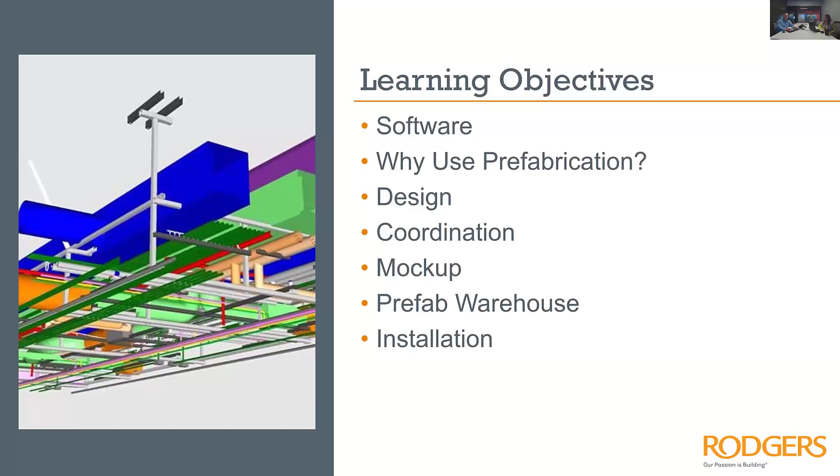From an overall perspective, our project was 108 beds of an install of an 8-story shell core building that we were all building at the same time. So there were 3 floors of med-surg beds that were being installed, 3 floors that were shelled, an interstitial floor of mechanical, plus the podium of the entranceway and support spaces underneath.

All total, it was 260,000 square foot of an addition, 27,000 square foot of a renovation. The overall budget for the project was $130 million, and the final came in at 120. So through the use of prefabrication and other means, we were able to save $10 million off of the project, and the overall construction duration was 20 months.

So we just wanted to touch on some of the software. Obviously, this is a technology group. We use BIM 360 document management, and that was through the owner's hub through Atrium, and then the design collaboration portion of that. And then they did not own Glue or Field.

And so on the Rodgers hub, we managed the Glue side and then also the Field side, where we were running all of our punch list, our issues, all of our document access for drawings and model viewing was going through both of those. And then we use Navisworks Manage as our clash detection software.

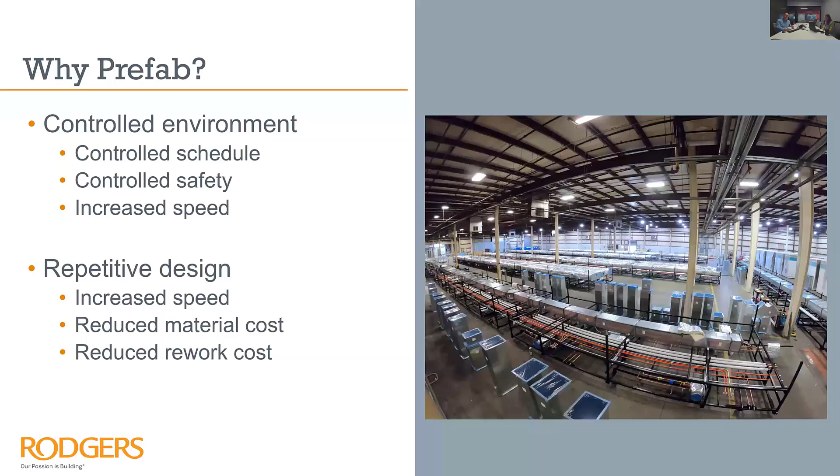Is this the video? Share sound. It stopped. Why did it stop?

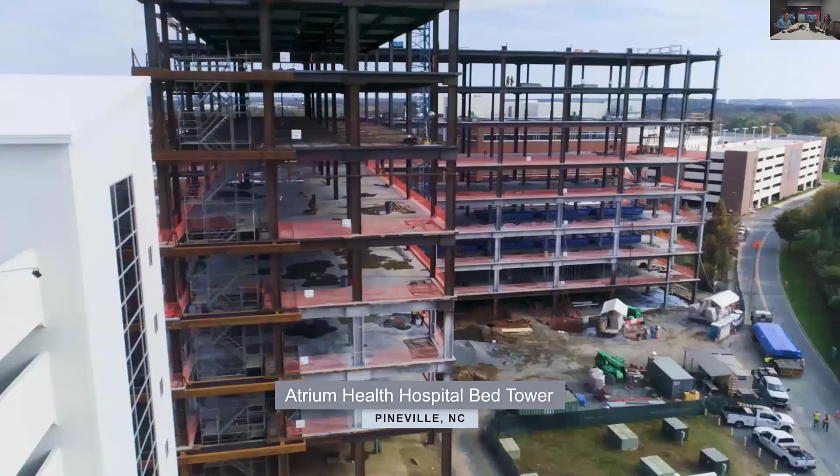Right now, we're on the Pineville Bed Tower project for Atrium Health here in Charlotte, Pineville. We had just completed a similar bed tower project that was traditionally built, stick built, on exterior masonry construction. At that point in time, we started to think that there had to be a better way to improve speed to market. There's a lot of waste in construction, and prefabrication helps us eliminate that waste, both in design and in construction. So on this particular project, Atrium Health wanted prefabrication, and they challenged us to do as much prefabrication as we could do.

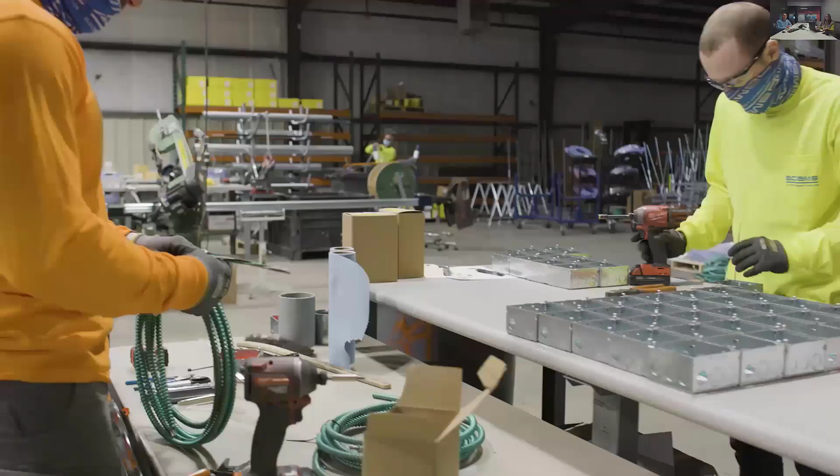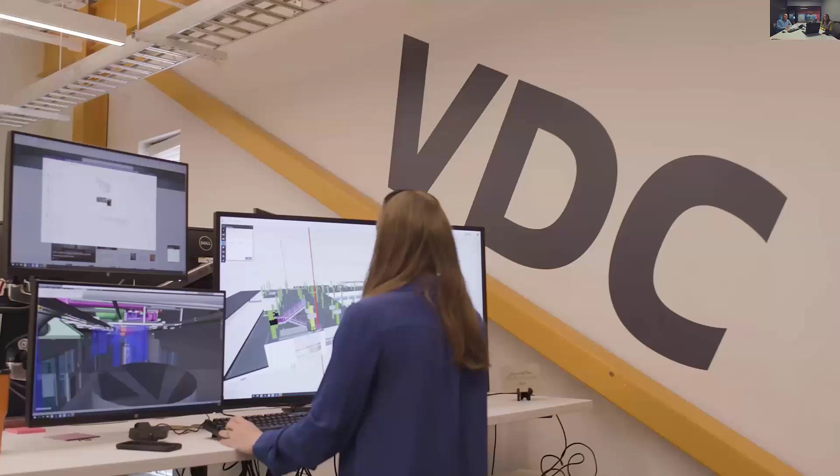VDC, or Virtual Design and Construction, is the process of taking plans for a project and putting them into 3D in a building where you can really see what you're going to do before we even start building it in the field. We have been able to create a rack that can be replicated over and over again.

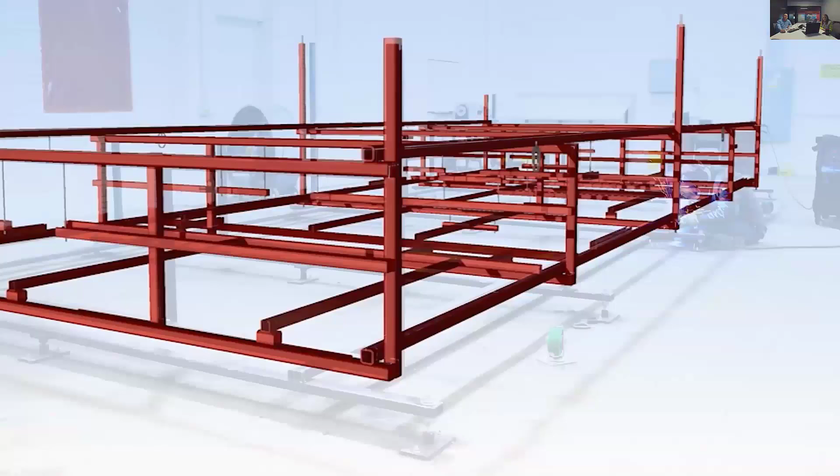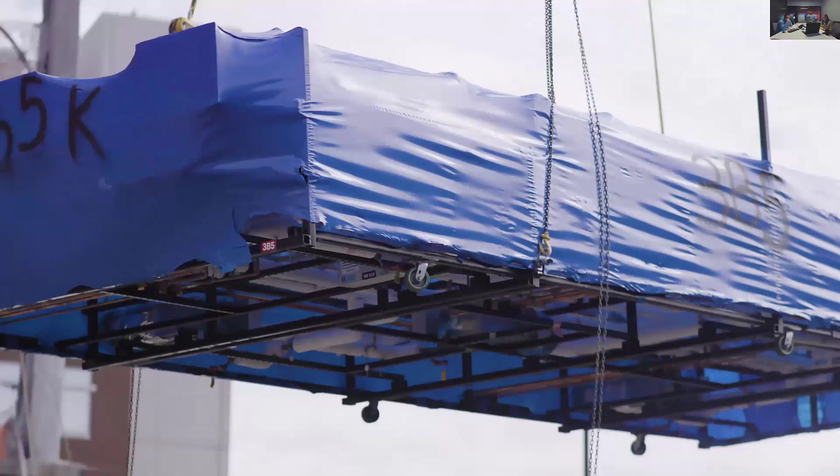It's allowed us to build the racks in a warehouse on the ground so they can really pick up speed and install them quickly. And then once we bring them up to the field, so much of the system is already put together that we can lift up a large portion of what the overhead would typically be all at once, which really eliminates a lot of the time that we have invested and allows us to reduce the amount of labor and workers that we have out on the job site.

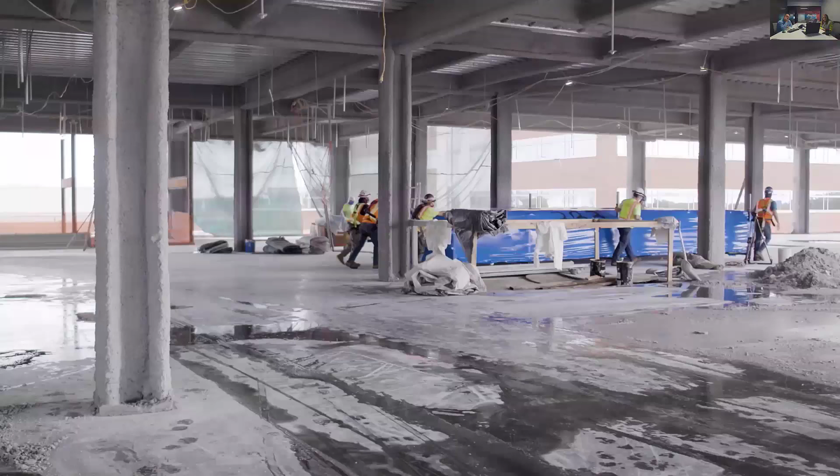Our end goal really is to just help reduce the amount of time and materials used on a project to deliver them to the owner sooner. We immediately told ourselves we don't want to do prefab just for the sake of doing prefab. I mean, it's kind of a trendy thing to say that nowadays. We wanted to make sure it brought benefits to the project. First and foremost is safety.

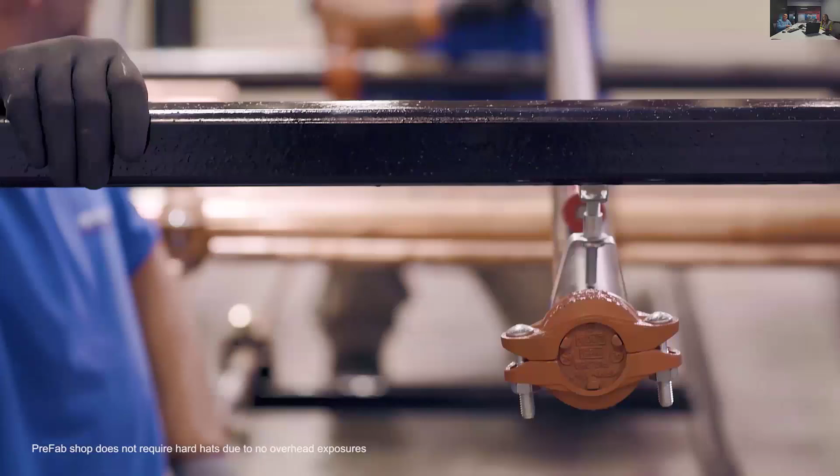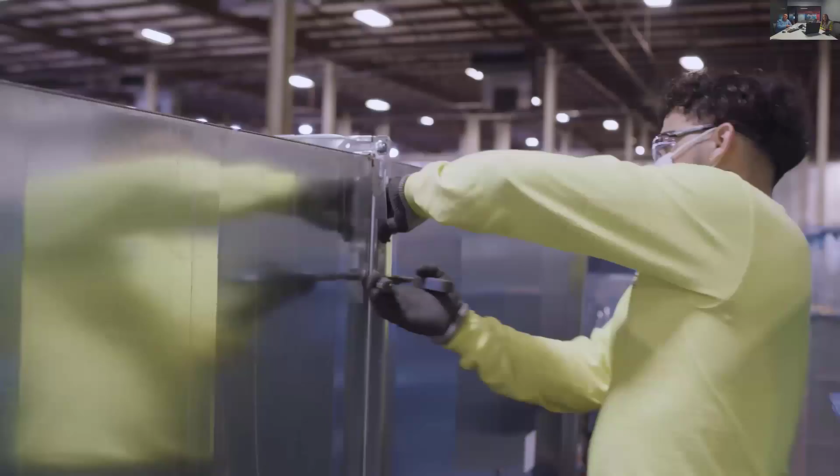Prefabrication, when you're in a controlled environment and everybody's working at waist level and ergonomically it's better for them, it's just much safer. Second thing is quality. When you're, again, in a controlled environment, you do a much better job with making all the connections properly, making sure things are passing properly, and you get a higher quality product.

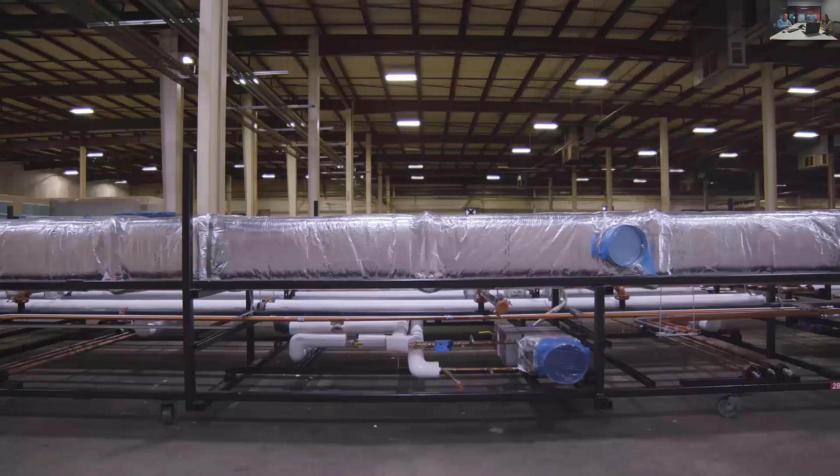It also helps from a schedule standpoint because you can start this work a lot sooner. So these bathroom pods were actually under construction while we were still coming out of the ground on this structure. So that would never happen if you were stick building. Same thing with the overhead racks that's behind me. Those all started several months ago, way before the building was ready for those racks to go in.

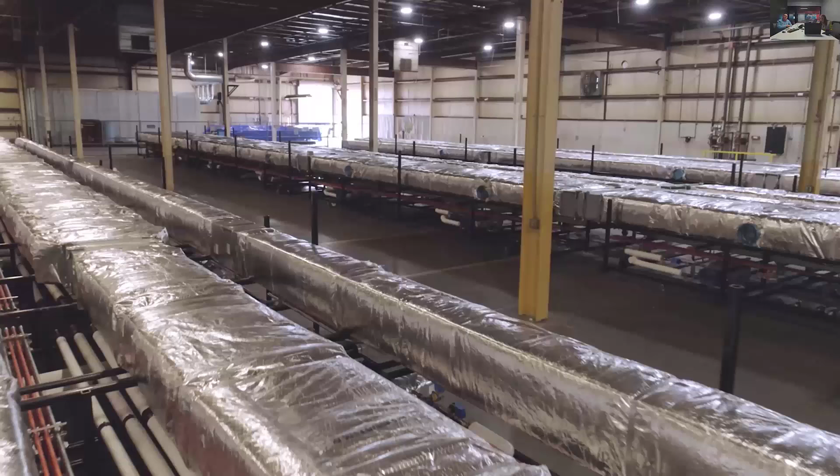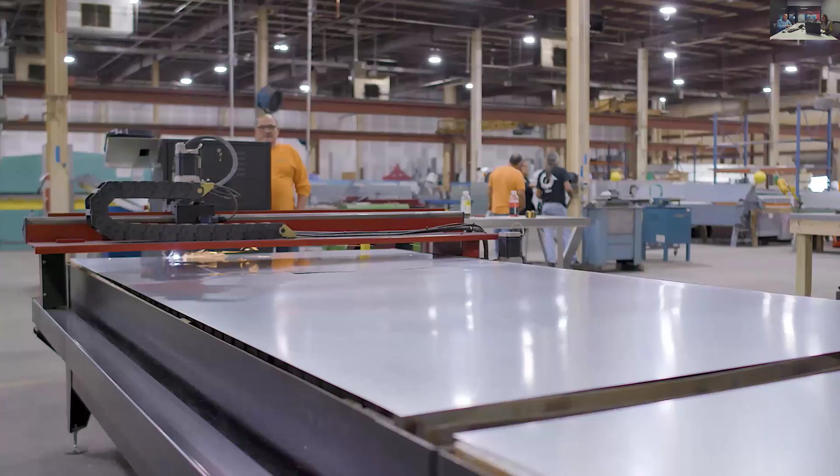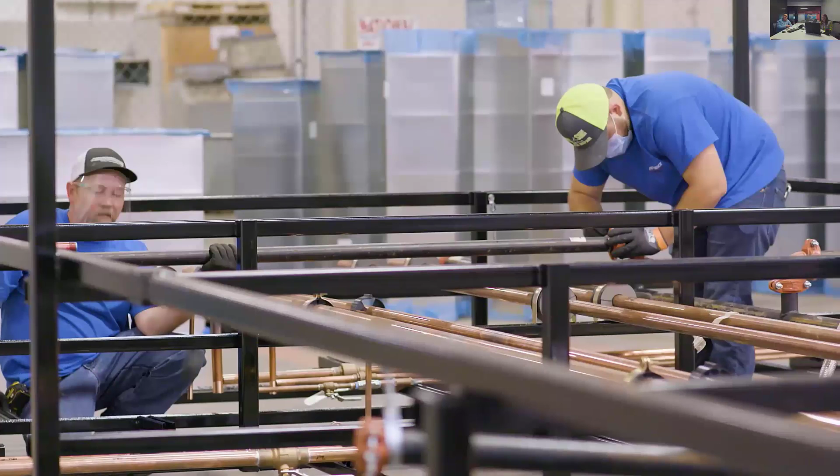What I think you're going to see here, not only in the Charlotte market, but other markets, is you're going to see a lot more prefabrication that takes place. The advantages to it become clearer and clearer as skilled labor becomes harder and harder to find. This project gave us the opportunity to introduce prefabrication to the subcontractors in Charlotte. And so our hope is that they learn from this project and want to do this on other projects and help us convince other owners that this is the right thing to do.

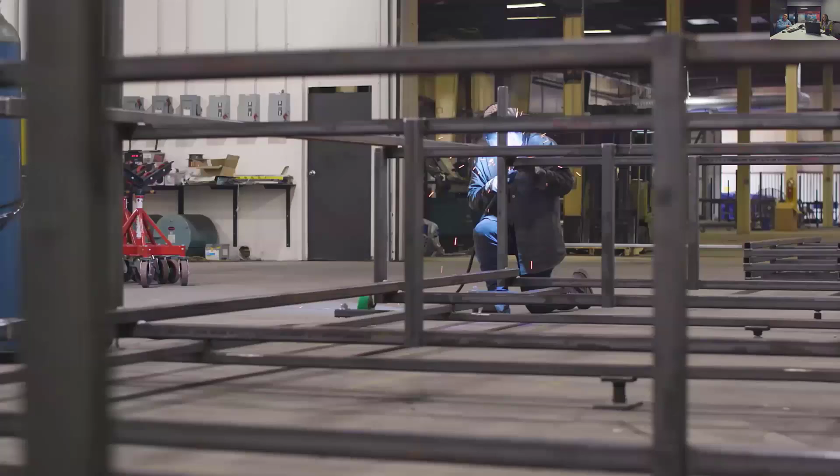Getting brought into something with this level of complexity was really exciting for us because Rodgers Builders is one of the premier contractors in our area and in the state. So we know there's a shortage of labor in the industry. We're going to have to get smarter. We're going to have to use our labor more efficiently. MSS thinks that the future of commercial HVAC is prefabricated efforts. We can do more in our warehouse quicker with the same amount of guys.

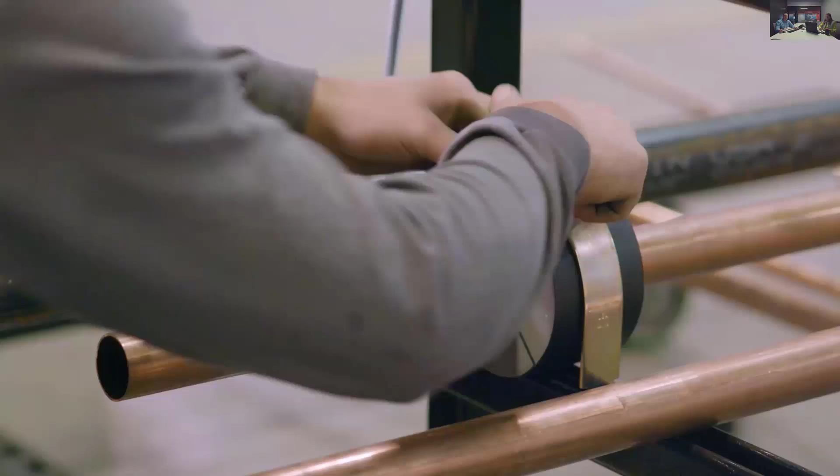10 years ago, if you looked at prefabrication in the electrical industry as a whole, it was more of a contractual obligation. Now this is a mindset. And now it's what can't we prefab? As tradespeople, we're proud in our work, we're proud with what we do. It takes a lot of planning, it takes a lot of time invested in the project, but at the end of the day, this project will come in under budget, and significantly under budget based on the type of project that it is. It's wildly successful.

You can see it here. I mean, the accuracy of those compared to the model are incredible. So the success of these racks really has contributed to Rodgers Builders and the trade partners of Performance Fire, Precision Plumbing, Adams Electric, and MSS. Without them, this would not have been possible. But it's just amazing what we've been able to accomplish here on this job with this team to be doing it for the first time. I'm just real proud of the effort that went into this project.

All right. Moving into the design itself. The video alluded to a lot of the prefabricated components that we had in the overall project. There were 108 toilet pods built, 108 head wall, foot wall combinations. The entire exterior envelope was panelized and prefabricated. That worked out to be 165 acrylic/EIFS panels, and then 173 thin brick panels. And those panels were installed in 23 days.

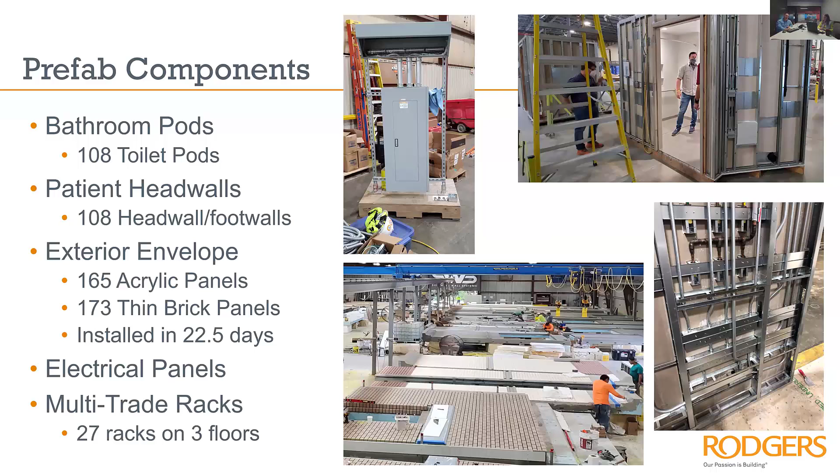The electrical panels and portions of the electrical rooms were prefabricated, and then of course the multi-trade racks, and there were 27 racks over 3 floors. The goal for this project set forth by Atrium was to have 25% of the total budget be prefabricated. We ended up with, at the end of the day, 36% of the total budget. And it was just like what Mr. Schroeder was saying, it was wildly successful.

Is this you or me? I think this one was you.

But it's fine. So from a design standpoint, and you saw through the video, we were designing this before COVID, during COVID, and then building it during COVID and after COVID. So you saw a lot of masks and a lot of face shields. It was essentially, from a design standpoint, a 13-month process.

We did co-locate. So instead of having a job site trailer, we had a 5,000 square foot space that was adjacent to the project site. And we implemented our big room meetings. You'll see the cubicles there. I was on site 3 out of 5 days of the week. Same thing with the engineering team, as well as any other design team and the major subcontractors, all sat in this space all together as we worked through the process here.

Yeah, so we had big room meetings in addition to just sitting together. And so you see that in the image on the bottom, but those big room meetings happened once a week with the whole team, about 40 people, and gave us the opportunity to talk through different ideas that everybody had and vet those out as a larger team for practicality, pricing, and then using that as direction on our design.

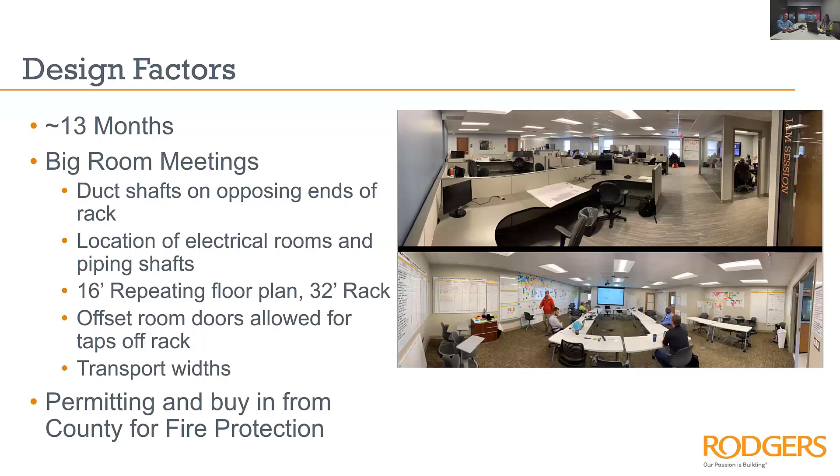Yeah, we treated the permitting, the fire marshal and local building inspection as a teammate for this project. They had seen prefabrication of toilet pods only when it came from the hospitality industry. They definitely have never seen it anywhere else, nor to this scale. So this was new to them. So we treated them just like a team member and brought them in early and often so that they were comfortable with what we were doing.

So I already mentioned that 16-foot repeatable factor with these patient rooms. So this was a sheet that the engineers put together, trying to make sure that if we were fabricating these very long rectangular racks, and then also the bathroom pods that we fabricated, could we insert them into the building, and could we make the turning radiuses we needed in order to get past the column grids that we had, because we did not have a traditional column grid where everything was lined up in the horizontal and the vertical.

So you can see here the columns are highlighted in that dark red, and so they're offset from each other to work with these slanted patient rooms. But this again was just something that we generated to have a lot of these conversations early on in that big room to help guide us.

Yeah, so let me take a quick second here and break down the floor plate for you. Each floor was broken down into two units. The bottom on the left, that's a 20-bed unit, and going vertically, that is a 16-bed unit. Each one of the rooms are same-handed. They are nested and canted. So there's really not a 90-degree angle in any one of these rooms, which also made for some very interesting construction details.

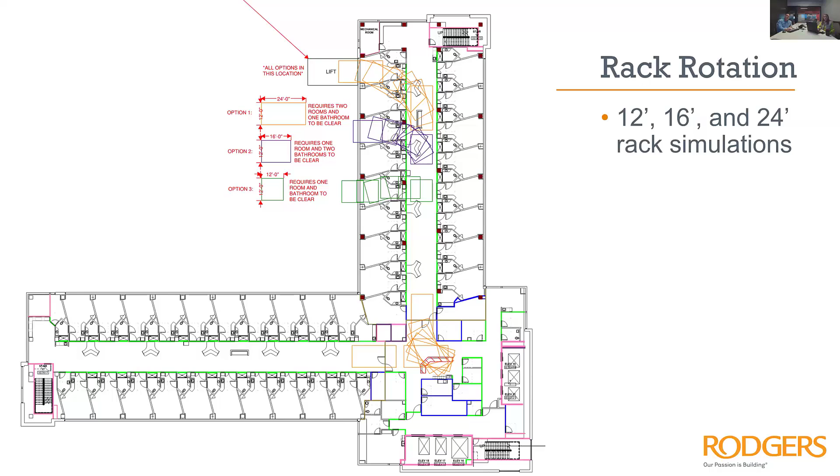So we generated A3s throughout the project to finalize decisions that we made in these big room meetings, and use them as reference if we needed to on why we made a decision later on in the project if somebody asked the question.

So this is the MEP shafts specifically, and one of the key things that we talked about was where do we place these duct shafts when we worked through what the racks were going to look like transferring down these corridors. And so originally we had started in a traditional sense where we had the shaft located in the center of the building, and that was going to support both the return air and the supply air.

But as we were having these conversations in the big room, when we started looking at the duct sizes to get an idea of what the layout of these racks would look like for width and height, we very quickly understood that the largest duct all happened together at the same spot, and the smallest duct at the ends of the corridors was all happening in the same spot. So the floor plan was revised to put the return duct shafts at the ends of the wings and the supply in the center of the wing.

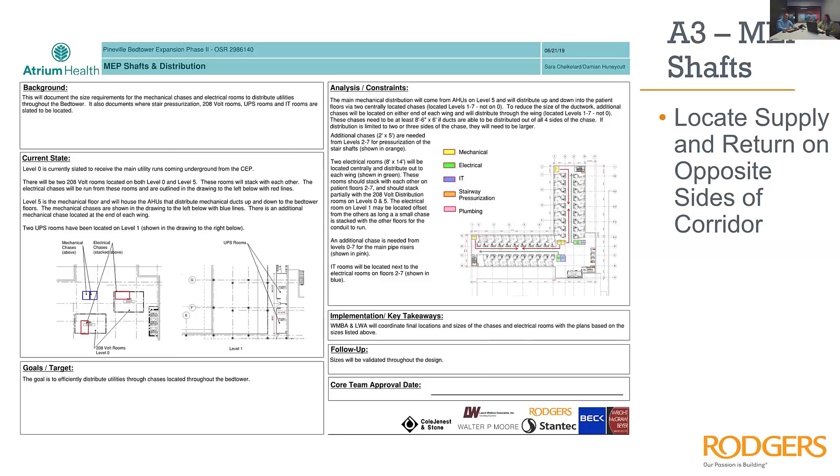And so that way, as one got smaller, the other one got larger, and they could share that same space in the rack. And we didn't end up with an inefficient rack, because by the time we got to the end of the corridor, there wasn't much left on it. Correct. And I cannot stress enough that once you make a decision like this, you document it and you move on, and you don't come back and rehash the decisions that you previously made.

So, I have a number of slides here that show some iterations of the rack. We're not going to talk through each one, but the takeaway here is we started with an idea of a rack initially on what we thought we could do. And then as we brought these ideas to the big room meeting every week, we had this up on a large screen, and everybody got to give their input on pros and cons, any questions they had, or anything they wanted to challenge us with.

You can start clicking through them. And so we generally would bring 2 iterations to the meetings, so everybody could rank the pros and cons between those 2 choices. Before you get too far, I don't want to foreshadow here, but you can see a clash already happening through the middle of the duct running through the space with one of my designs for the soffit. So this was one of the early iterations, and this is where the back and forth went through from a design standpoint and a constructability standpoint. I'll talk more about this in a minute.

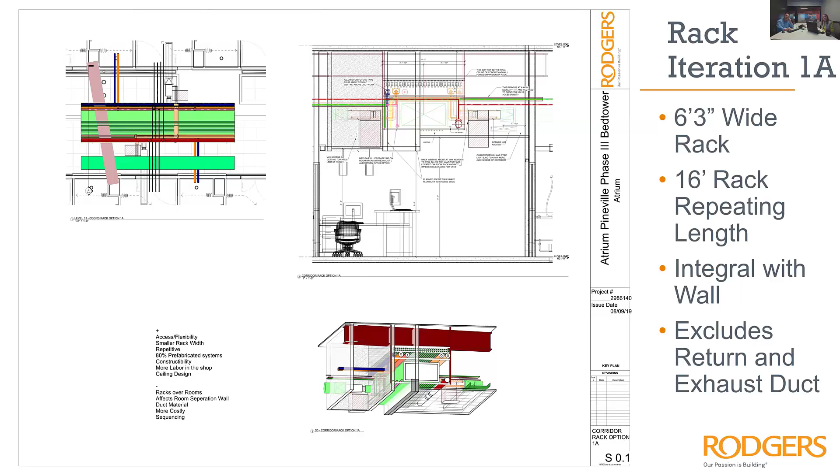Yeah. So we ended up on iteration 8, I believe, is where we finished. Damian's clicking through them, you can see them evolve. It ended up getting larger to where we stopped at just shy of a 12-foot wide rack, which was the stopping point we had decided on to make sure we were meeting DOT requirements with wide load permits and everything. And then it was 32 feet long, so again, that's that multiple of 16 for the repeatability of the patient rooms.

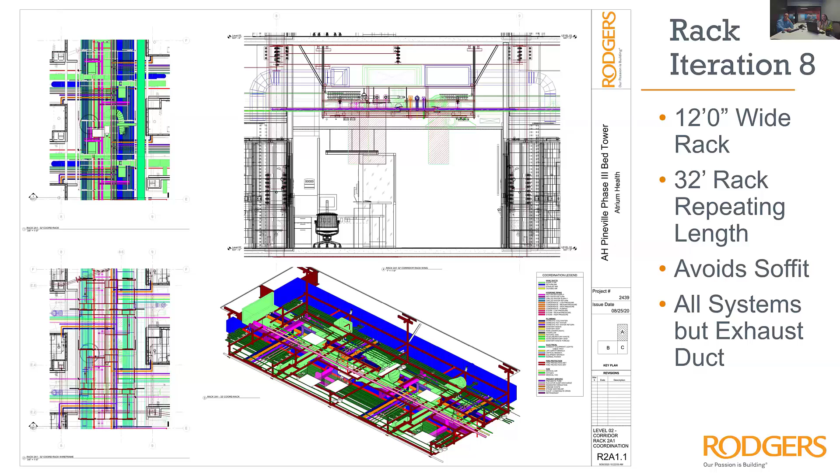As Damian mentioned with the soffit, you'll also notice in the top right section view that the soffit has disappeared from the center of the corridor, and it's moved back to only be 2 foot off the left wall. That was on purpose, to not have to worry about how to attach a soffit wall to the bottom of that structural rack. And once we finalized everything in that 8th version, we wrote an A3 that summarized how we went through that whole process.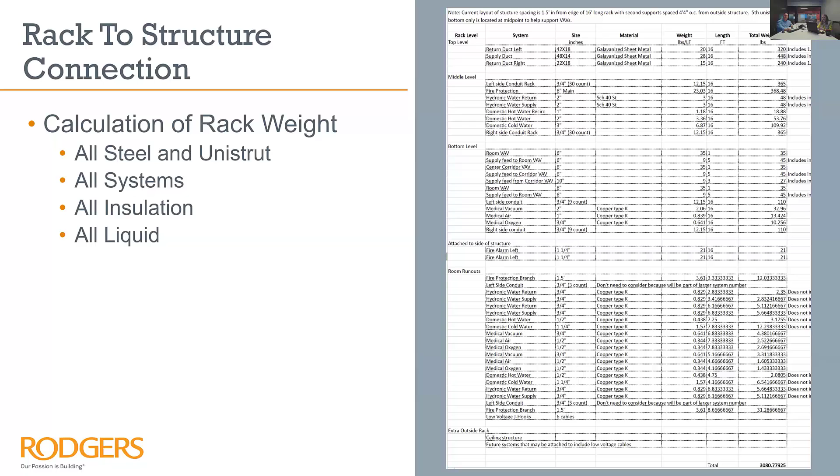And then everybody plugged in the weights that they had, each trade, and whether it was filled with water or not filled. And then that way we were able to give this spreadsheet to the structural engineer and he could start running all of his calculations to start designing what those connections looked like. So these are the 3 details that he came up with. We had some connections that went to the deck and then some connections that went to beams. And so he had 2 different types of connections that he identified on how that would work.

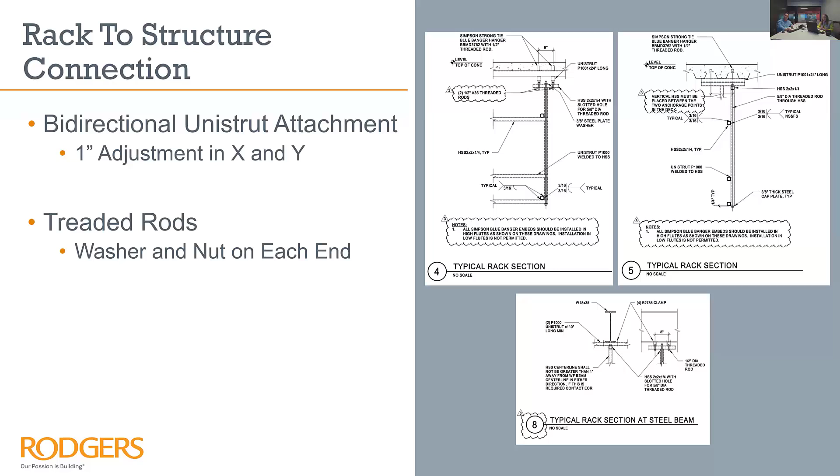The big thing to take away here in that design was that we had a 2-directional connection there at the deck so that we could have a 1-inch adjustment in the X and Y. So as we were lifting the rack, if it was slightly off, it had the ability to move versus having a set embed that you were having to hit exactly. So if it had shifted during a concrete pour or something, you'd have a lot more trouble trying to get that up and then having to pause to put in a new embed or something.

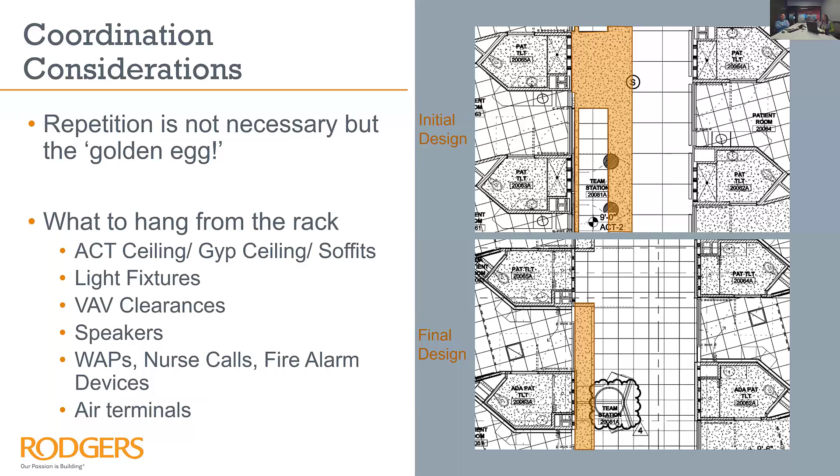And so another change that happened because of these racks was the linear diffusers that had been in the corridors. The initial design had them parallel with the corridor, but because of the space that we had above the ceiling, the height of the linear diffuser was about 10 inches tall, and the bottom of our racks was actually only 8 inches above the ceiling. And so by being able to turn it that 90 degrees to be perpendicular to the run of the corridor, we were actually able to nest it up in between the frames of the racks to still have them located in the same spot, but give us that coordination there.

Architecturally, we were being really meticulous in the ceiling about how things lined up, and we wanted to be very purposeful. So it would have been really easy if we just moved it completely off-center as needed, willy-nilly, wherever it needed to be. But ultimately, we were able to coordinate and work this through. So we were working from an aesthetic standpoint as well as a performance standpoint. Absolutely.

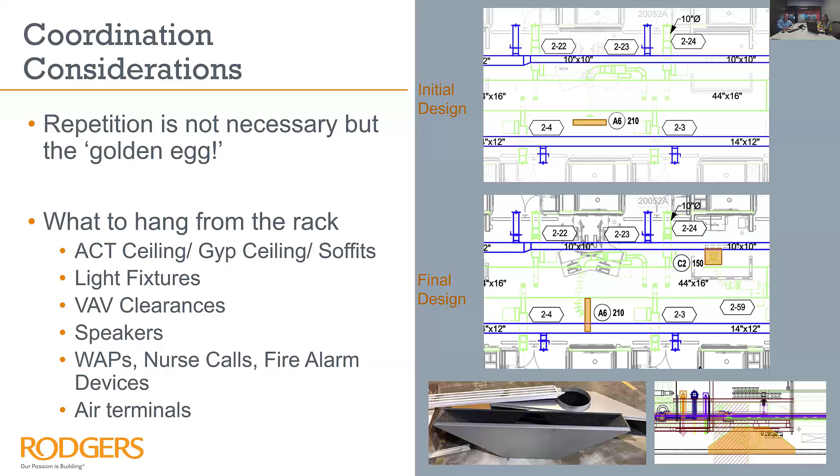So once we knew where everything was going to be located on the racks and worked through that ceiling coordination, we did also need to understand how are we actually attaching all of these systems to the rack so that they knew how to fabricate everything with all the miscellaneous steel that we need to add in. And so we spent a decent amount of time, a lot more than we thought going in, just making sure we covered all the details of exactly is everything supported at their maximum distances between attachment points or less.

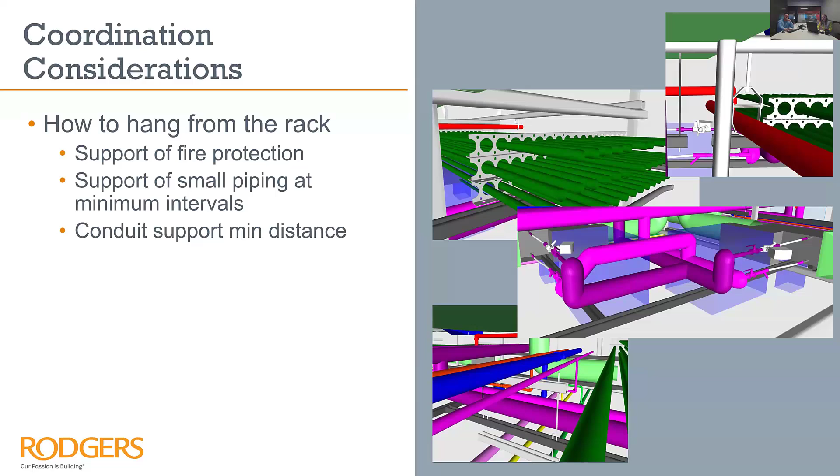And what does that look like? And does that start to create a problem once we put those in with another system being in its way? So this is just some images of kind of all that population coming in with the hangers, the punch templates for the conduit, and the extra unistrut that was added in. So in order to be able to have conversations easily with everybody and reference individual racks, we did create a drawing that showed those rack naming conventions.

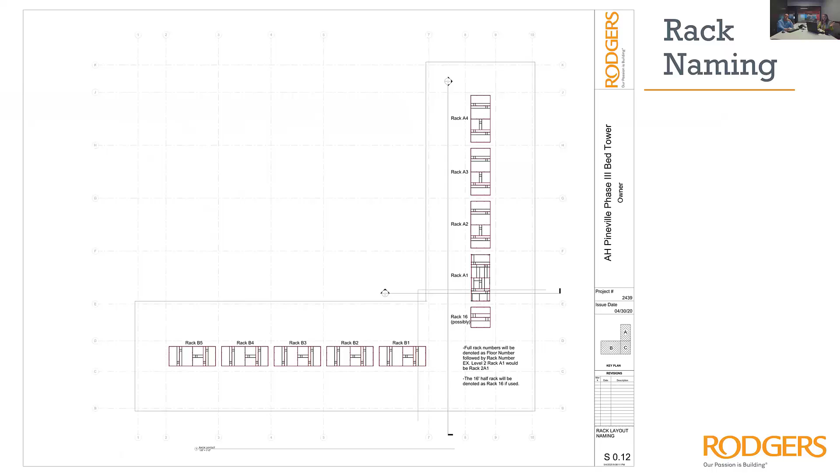So we had a wing A and a wing B. So it was easy enough. We just started with the number 1 in the center of the building and then worked our way out to the end of the corridors. But that gave us the frame of reference to reference each one individually.

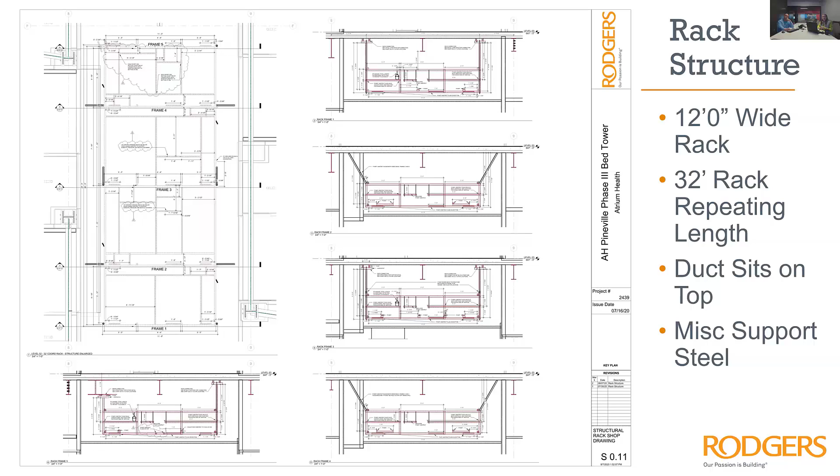And so then we started working on the actual rack drawings themselves. So we had 3 sheets that we generated for every single rack. So there are 27 racks because they varied even from floor to floor, even though they were basically the same floor plan. Some of the services that we were providing for the type of patient room varied a little. And so our pipe sizes or something would change from floor to floor.

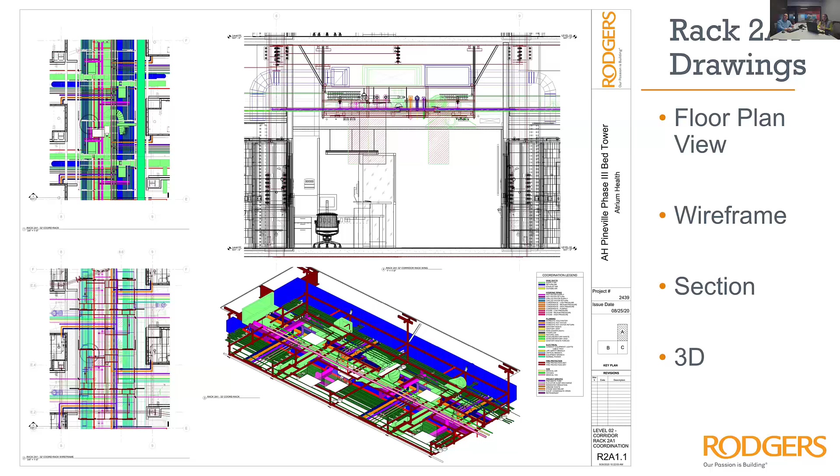So the first page was everybody together. And then the last 2 pages was just split out individually by plan view and section for each individual type of system so that they could be tagged and dimensioned for easy reference.

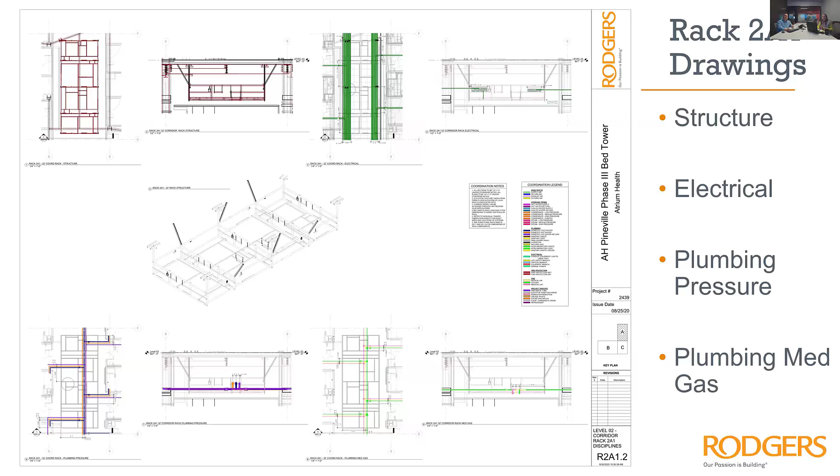Keep going. So then we created mock-ups. So we had 3 mock-ups total. This was mock-up number 1. And then we were able to have everybody kind of give their feedback on it and how that worked, putting it together. We also learned from this one that this one was right at 12 feet wide from one side to the other of the structural rack itself.

And then when MSS tried to roll it out their door, their rolling door in their warehouse was actually only 12 feet wide. And the casters that sat on this stick out a little bit beyond that 12 feet. So they couldn't actually get it out of the warehouse. They have a wider door now, but we were able to easily modify it, luckily, and bring the outer HSS members just inbound of the verticals without having to modify anything. So we really just got lucky there.

And so that was mock-up 2. I like to say that it didn't fit through the door because they didn't model the casters. And that is still on my punch list to remove the casters from the racks. And they are, yes, they are still on the ceiling.

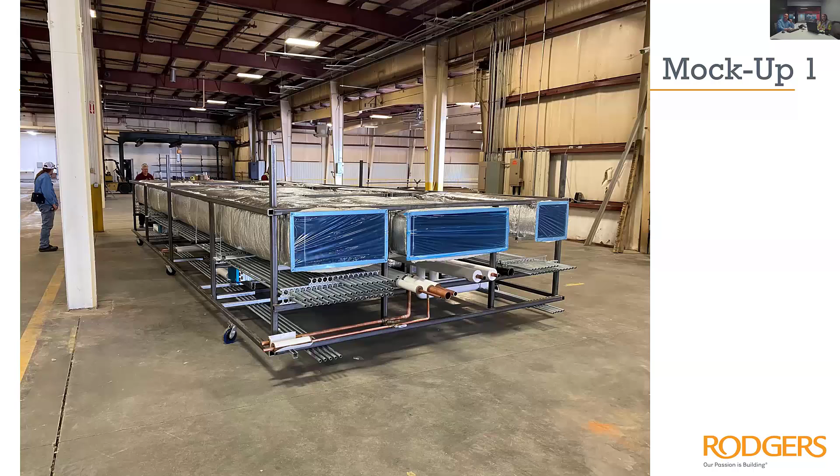Yeah, so what LOD do you think modeling the casters would take you to? That level of detail, 750. They got left on, so technically we probably should have been clashing them, but

So mock-up 2, we actually installed in a full scale mock-up of patient rooms and corridors too. It also gave the opportunity for Atrium's POM team to come in and actually walk it and look at how the rack interacted with the ceiling grid for access to everything.

And they had one comment to change where they wanted the circuit setter hooked up to the VAV, but that was about it. And it really gave them that sense of confidence that they were going to be able to maintain this stuff easily because the clearances were all there.

The other thing here is, one of the other reasons why we wanted to do the rack was we were pulling anything that needed to be serviced out from over top of the patient. So everything is now inside of the corridor so that if anything ever went sideways, it could be maintained from the corridor. They would never have to affect or relocate a patient inside of one of the patient rooms.

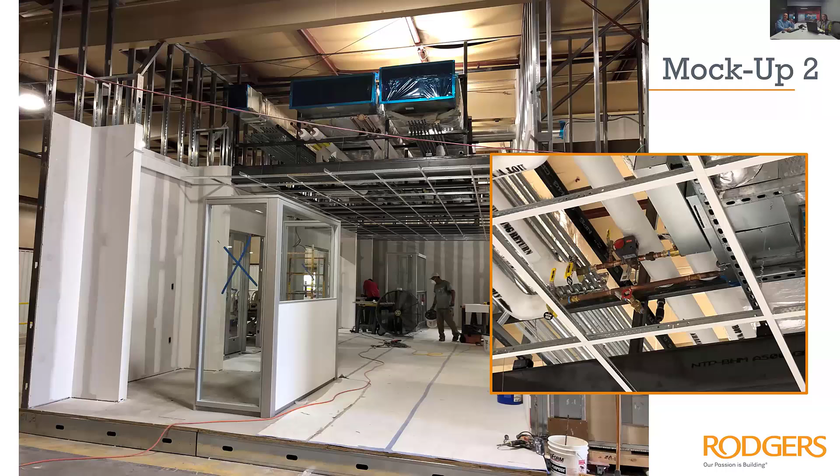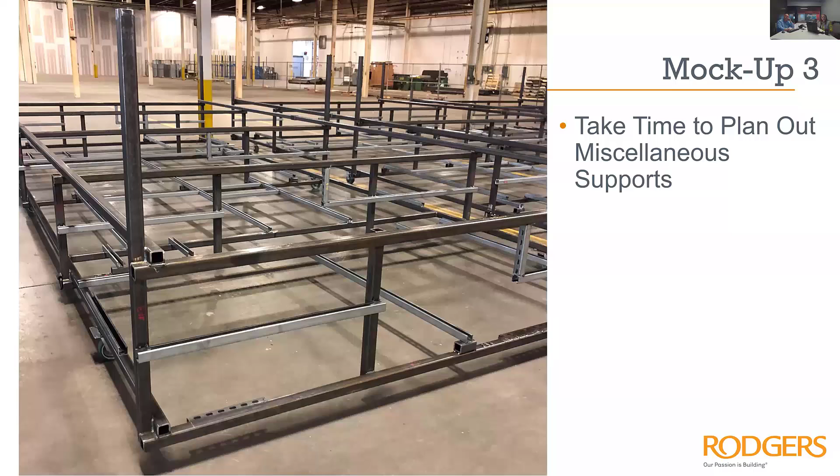And so then mock-up 3 was really just a couple tweaks to the actual miscellaneous steel hanger stuff. And so at that point, they just started fabricating all 27 racks. So that's 3 of them you see there.

So just kind of how did it work in the warehouse itself? MSS had just moved into a new warehouse and had a nice space in the back that was empty. And so they were able to lend that space to our entire project. They gave all the other trades a 20 by 20 or 20 by 25 fenced off area within that space that they could store their tools and their materials and stuff. It was just a chain link fence that they could lock up each night and leave their stuff.

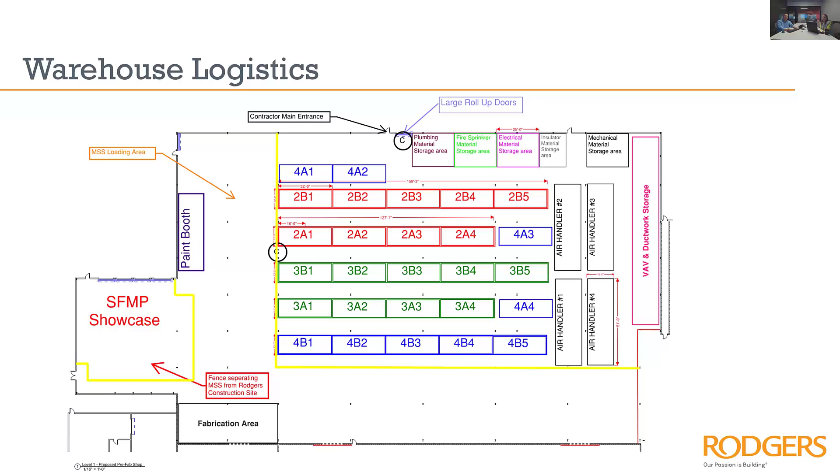And then we ran these racks in full corridor lengths, except for that 4A corridor that we didn't have the space. And that way they were hooked up the full length. There weren't gaps in the racks in between them. And that gave us the opportunity to actually pressure test everything in the full run so that we could insulate in advance of shipping it out. And then if we had a pressure test issue once it was hooked up in the field, we at least knew it happened in between the racks and not on a rack, to try and track all of that down and rip insulation off.

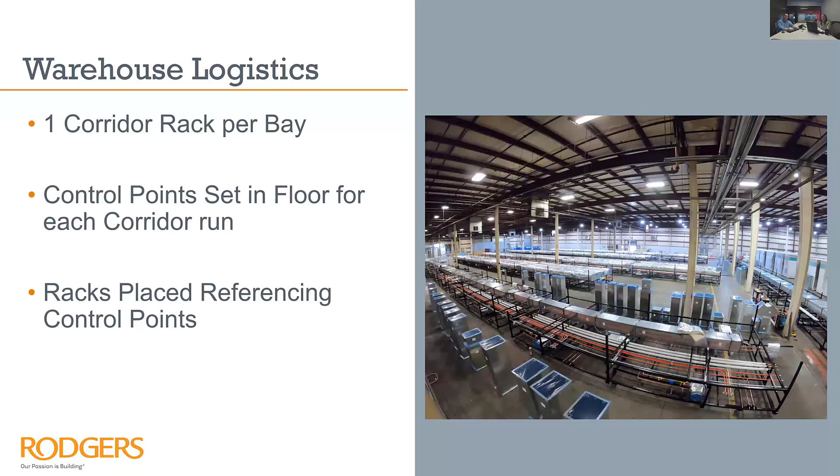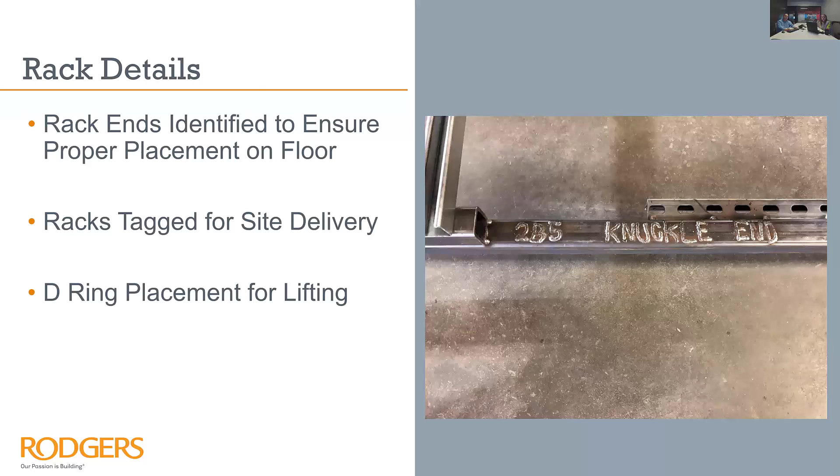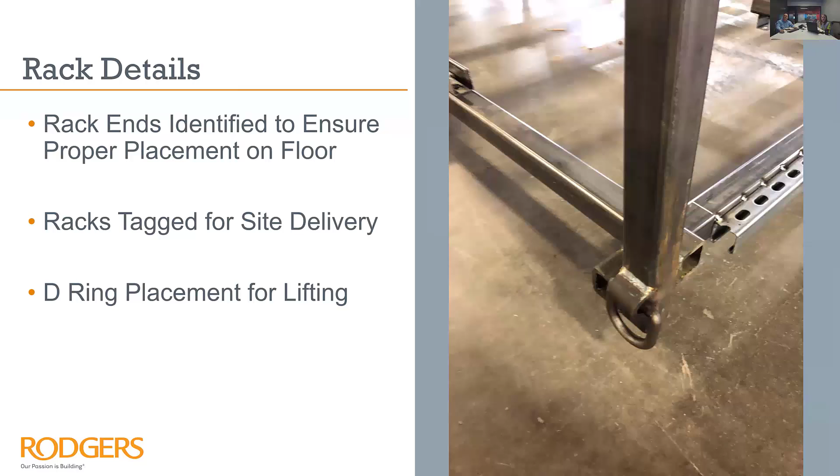So this is just kind of what it looks like inside the warehouse. They did have some control points there to help them set how far apart the racks needed to be from one another and get all that lined up. They also sent one of their newbies out there that was learning how to weld all these names on. And then they also tagged them with tags so that once it was lifted up above our heads, we could still see the name of the rack. And so then for lifting purposes, they had a D-ring there that you see attached. They had 4 of those around each rack to lift it with the tower cranes.

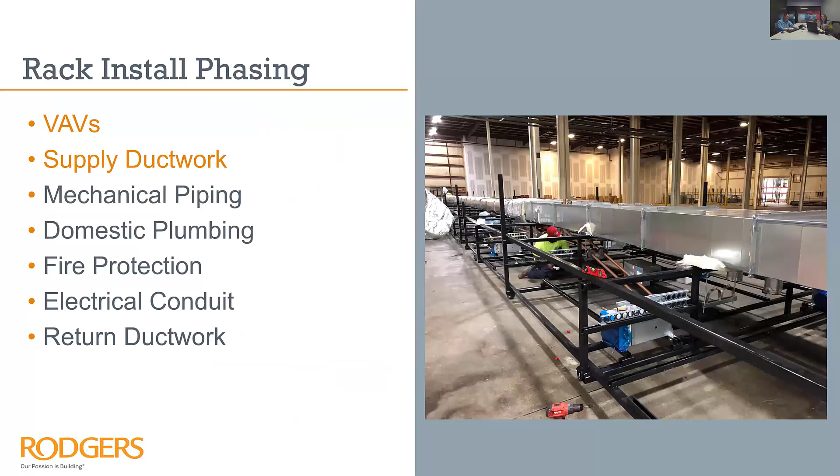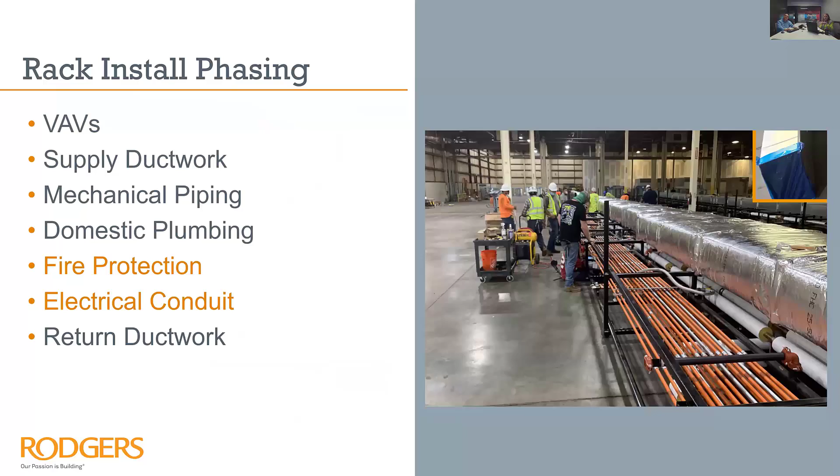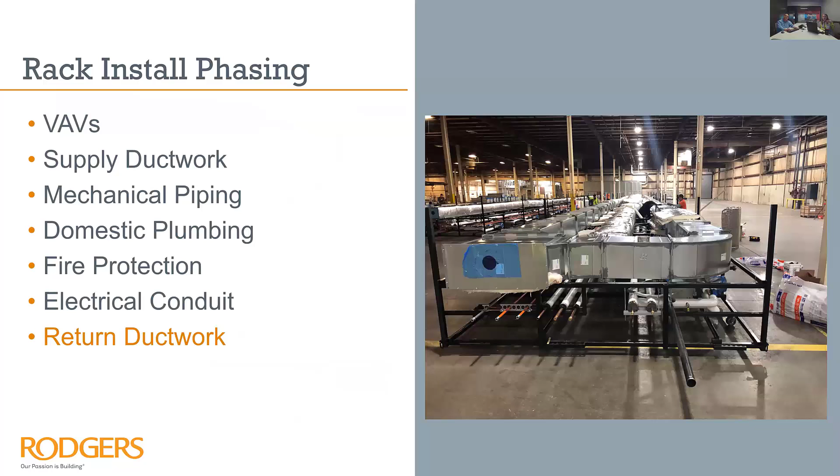So we did generate some rack install phasing drawings also for them that they were able to print out full scale and then put up in the warehouse for everybody to reference on who had what order. And so then these are just some pictures showing the VAVs going in first with the ductwork and then the mechanical pipe, and then the fire protection. So basically we started in the middle and worked our way out to the edges. And then we came in and put the return duct on the top outside of the rack after the fact. So we hadn't put any of that big ductwork up top that would prevent people from being able to easily get to the middle level of piping to install.

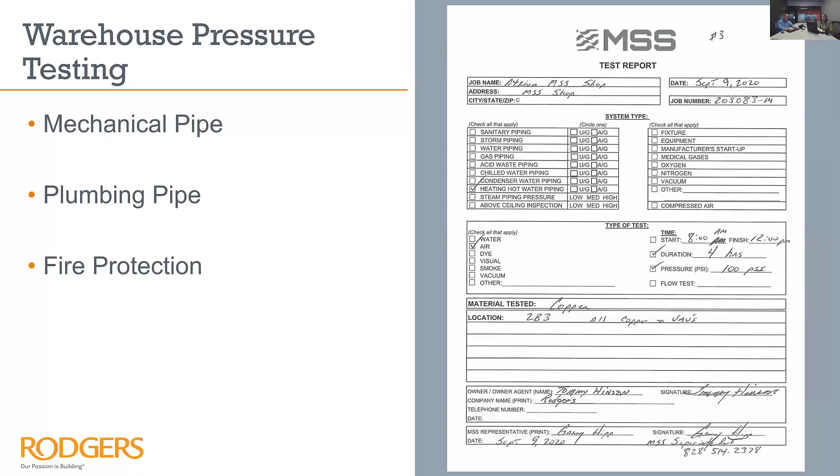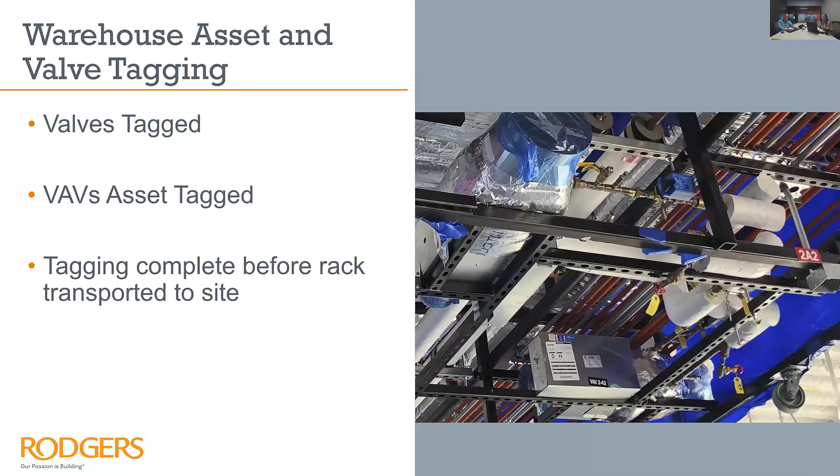And so then this is just an example of that test report that we did for the pressure testing in the warehouse. And then the other big thing that we did before we shipped it out to the job site is Atrium requires asset tagging. And so we were able to asset tag all of the equipment that was on the rack while it was still on the floor and also tag all the valves. So that really saved us a lot of time not having to go up and down ladders on the job site above our heads trying to apply all this stuff.

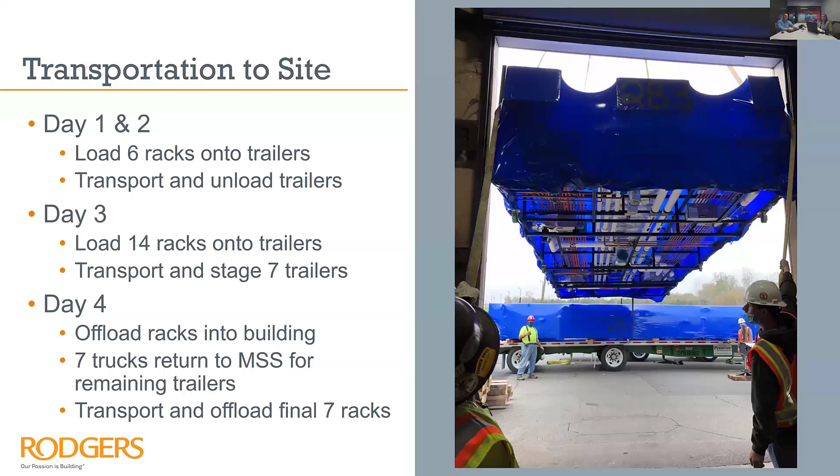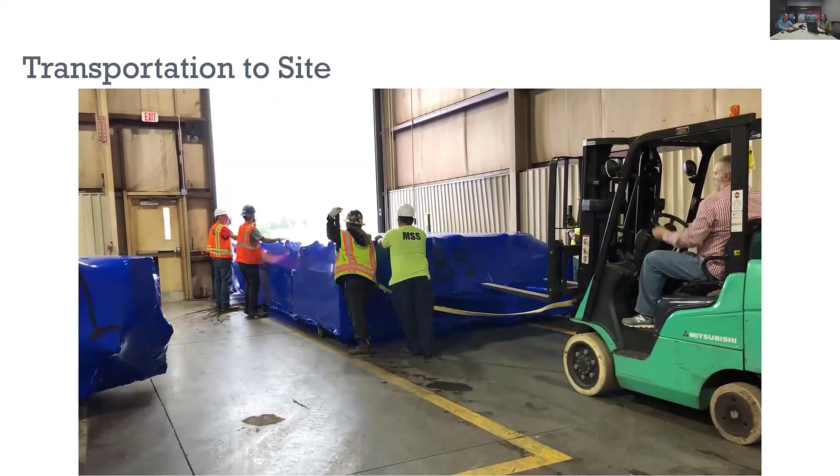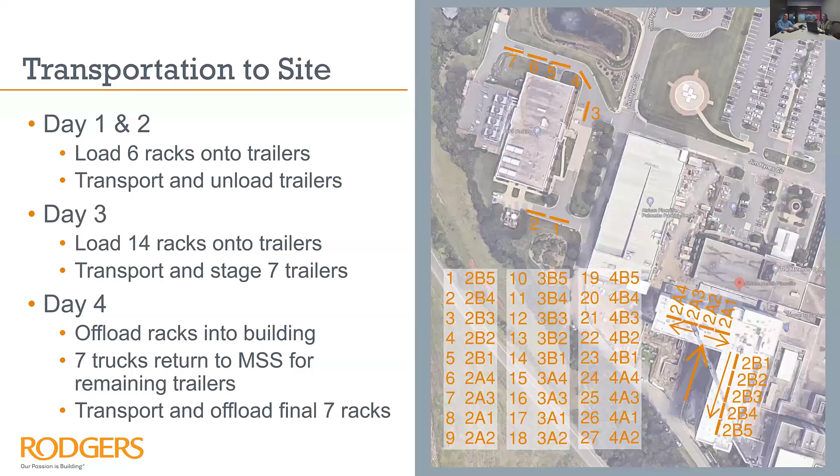So they transported to site. They picked up some cranes, transported half of them in preparation and staged them on the campus beforehand. And then they transported the rest the next day and started lifting them. So these are just some images showing that. They just slowly push it out. The forklift was just there to stop it in case it started getting away from them so that it wouldn't continue rolling. So this is just what it looked like pre-staged. And so we had figured out how it was all being lifted in order to roll to the right location without having to jockey them around.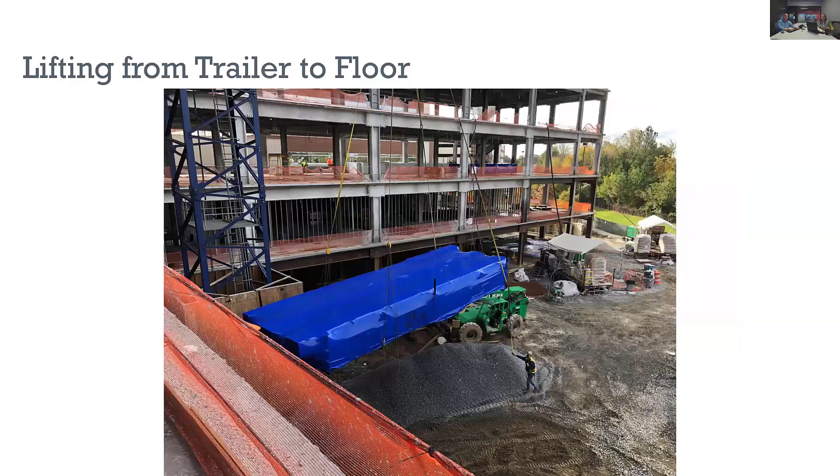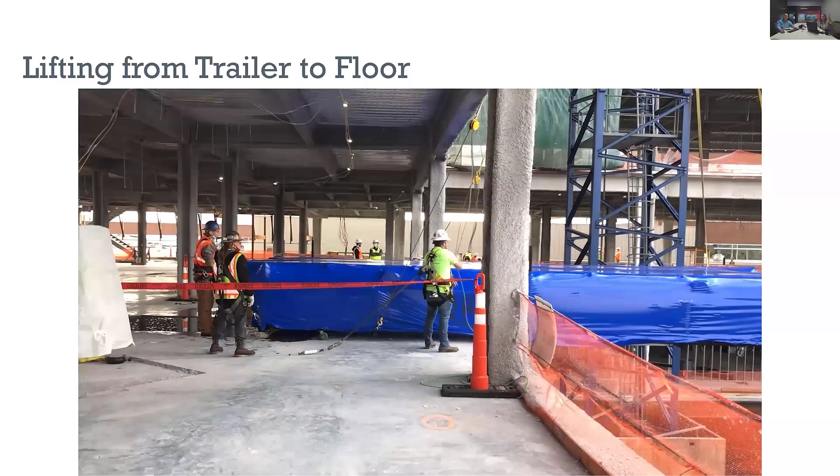And then there's a lifting video. Is this the video? There's the video. It's sped up really fast, I think. There it is. Do it one more time. I wonder if it will play better without sound. Yeah, unshare sound. Okay, the chipmunk sounds interesting. In Virginia, we can't hear you talking over the video. Maybe if you turn the sound off on the video. You did. It's all right. We'd unshared it, but okay.

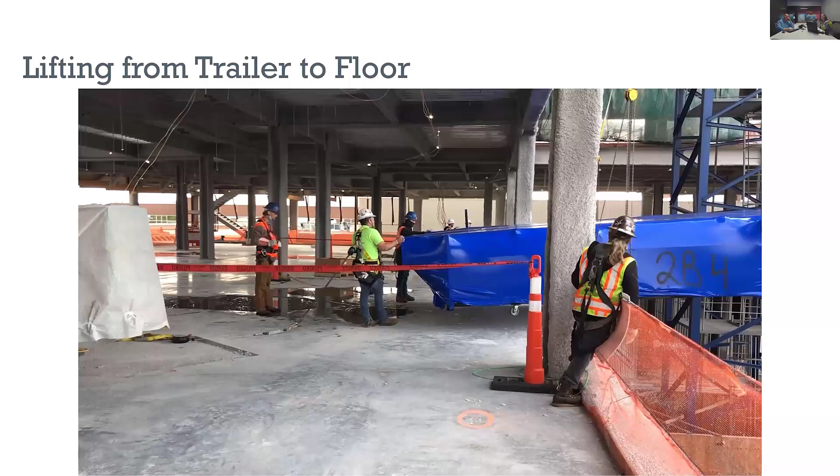So, as this was coming in, basically what we were trying to show is that the fireproofing was already sprayed on the steel. And so we had talked through enough of the logistics to know that we didn't want to accidentally bump it off. And so they had placed the D-rings for lifting at frame 2 and 5 of these racks instead of frame 1.

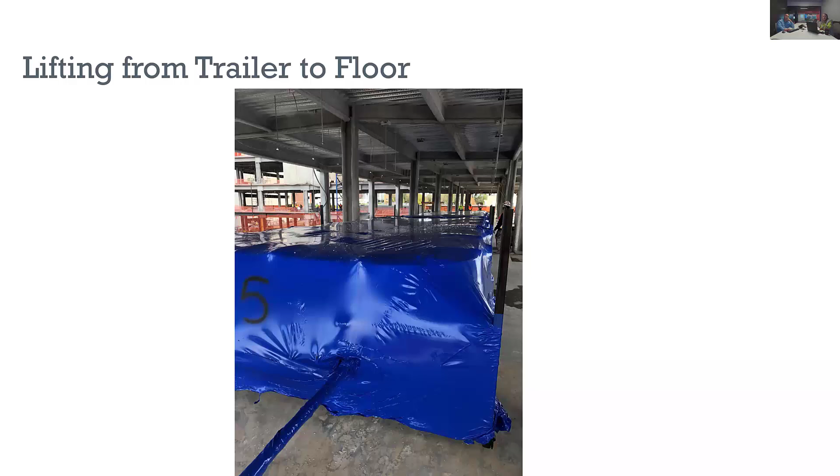And that allowed us to have enough of the rack come in to where the workers could get a hold of it safely without being on the edge of the slab, get the caster set on the slab, and disconnect the rigging from frame 2 D-rings without that rigging coming inbound so far that it was actually going to jeopardize that fireproofing there on the steel for us to have to go back and redo it.

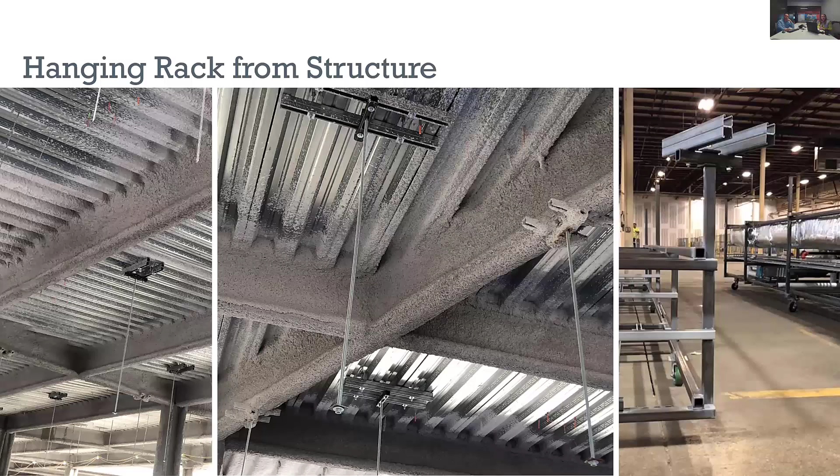So these are just some images of what it looks like on the site and also the attachments that the structural engineer had done. And so then the big thing here, it was the first time we'd done it, obviously, so it takes a little while to get used to a new process. It took us 52 minutes to lift that first rack and get it set and everybody back on the ground.

By the time we finished with that first floor and the 9th rack on it, we were down to 16 minutes. And then sometime between there and the 27th rack that we lifted, we were down to 9 minutes a rack. So this is 12 feet by 32 feet worth of MEPF systems that we were lifting in 9 minutes. So how fast we could install this incredibly sped up the process that we would normally have if we were having to stick build all this in the field.

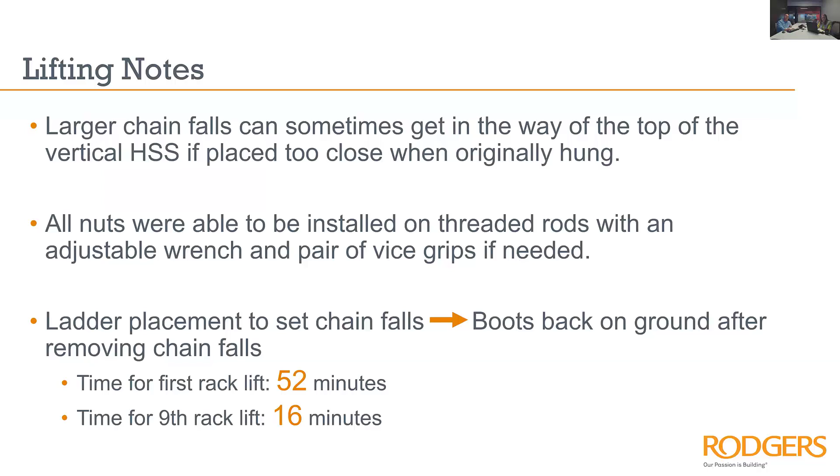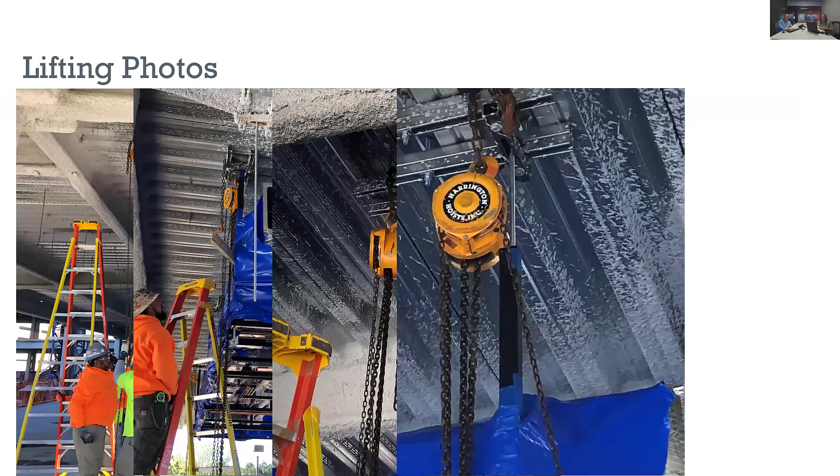And then these are just some images of what that looks like. We lifted it with chain falls, you can see here, that were just wrapped around that structural attachment. And then once we did that, we pieced it back together. We had 1 foot sections of duct that would pop out, spool pieces, and those got replaced back in.

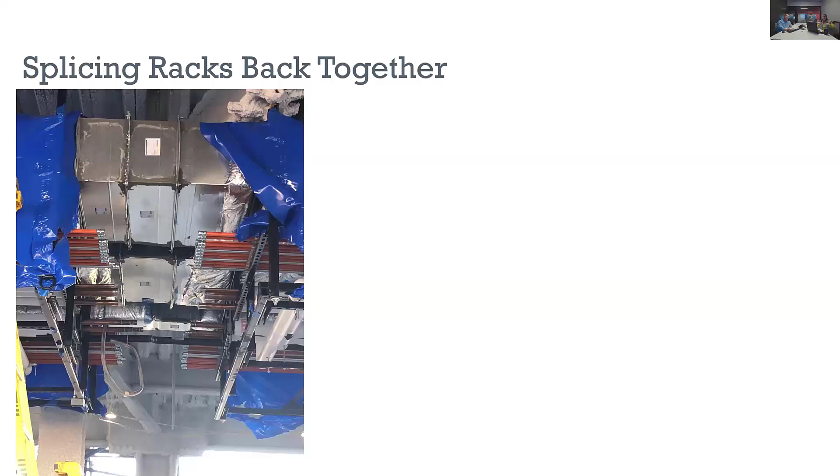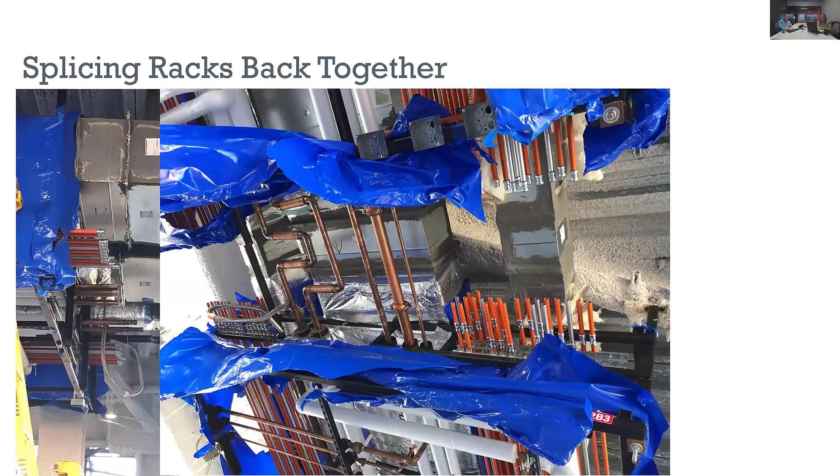And then the pipe, which was the level below, was 2 feet wide with the intent to give the workers enough space for their bodies to be able to get that 1 foot section of duct in without being pinched in between pipe. And so once all that was pieced back together, they were able to run the pressure test again in the field just to make sure that they had everything hooked up well.

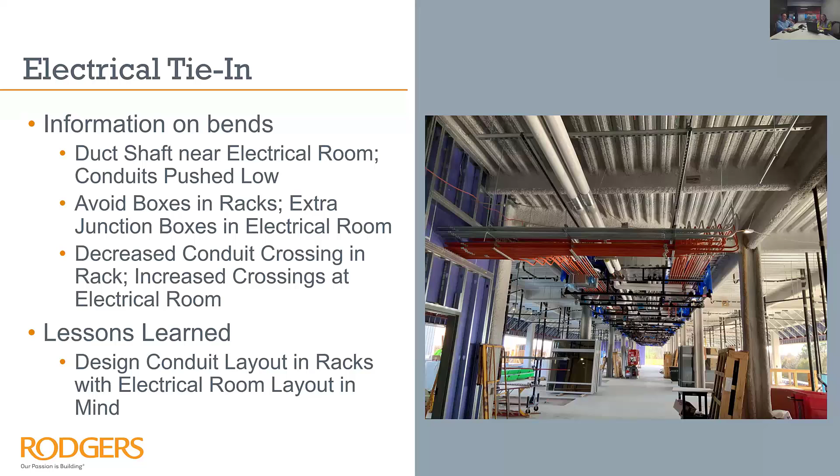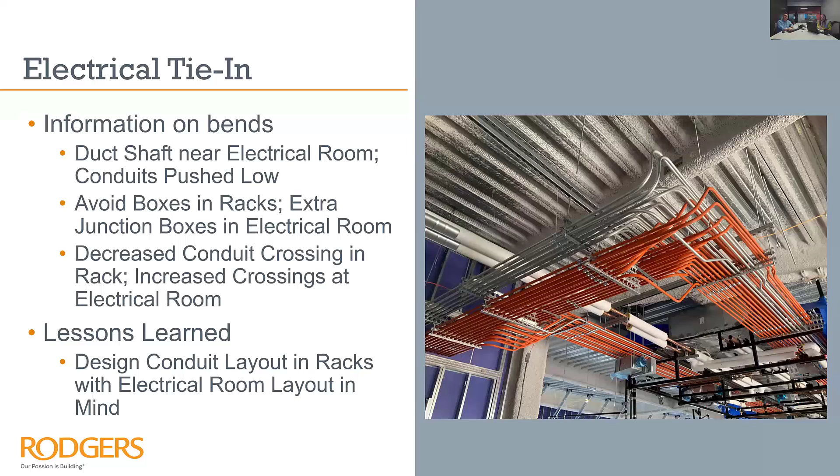And so one of the takeaways we did have from all of this was actually the electrical. There was a lot of electrical on there. And when we built it, the electrical did not come out at the same elevation that it needed to enter the rack. So you can see in the picture here that it ended up causing a lot of bends that they had to put in the field for this portion, which was stick built out there. So that's one of the things that we learned after the fact that we like to point out as a lesson learned, to take into account.

So, in conclusion, I know we're running short on time. We want to leave some time for questions. Virginia talked a lot about how fast we were installing all of the racks, and we got down to 9 minutes. We were able to dry in the entire building on the exterior. From when we started the dry-in process to finish, it was 11 weeks.

The example that we have is of another bed tower 30 minutes away from here that was of similar size and scale. That project was stick built with brick and curtain wall and precast. It was 11 months. So we know that there was a substantial savings that could be had from prefabrication. And ultimately, at the end of the day, we were able to do that.

So when you look at this from this standpoint, we were able to open the tower 90 days ahead of schedule. So with 108 patient beds that they could be billing at $1,000 a day, and that's just a really round number. That's different depending on the modality of the room, whether it's a med surg room, which is around $1,200, to telemetry, which is $3,000 a day, or even ICU, which is $5,000 a day. Let's just say $1,000 a day, 108 beds, 90 days ahead of schedule.

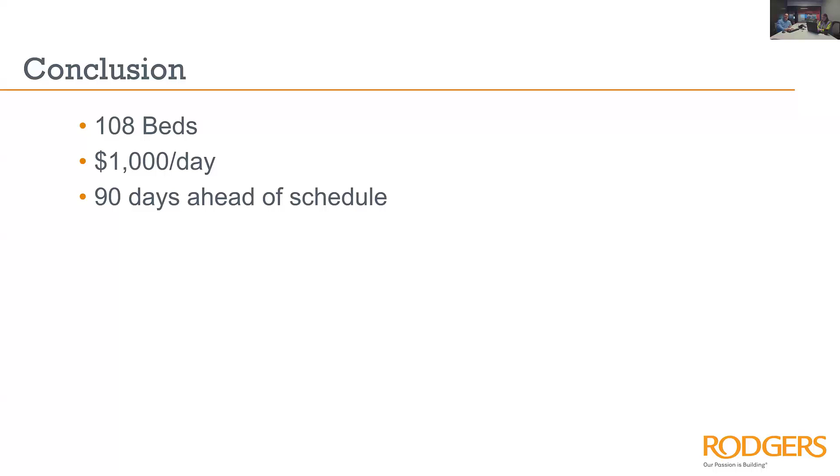Ultimately, this is allowing the owner to generate $9.72 million of revenue just by us opening early. And that was all due to the prefabrication efforts. So remember, I was asking earlier, why should you prefab? And my response was, why shouldn't you? And this is the reason why.